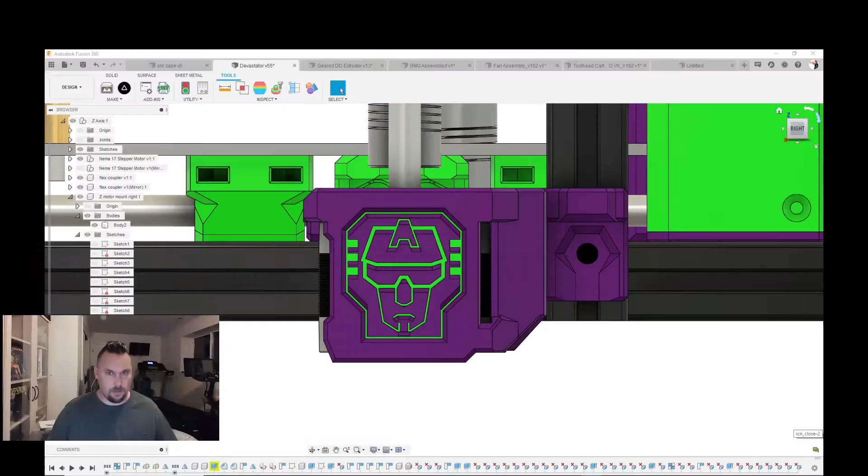So let's switch over to Fusion. Take a look at a model that I have up here. This is a Devastator logo that I've created. We're going to walk through taking this and creating an SVG out of the sketch that I used to create this icon. The first thing we're going to need is this.

This is an add-in called Origin. To get it, we need to go from the solid workspace, which is where we've probably started. Go to Tools, do the Add-ins dropdown, go to the Fusion 360 App Store.

Here we're going to search for Origin, and here it is. We're going to click on this and download it and install it like you would any other add-in. I've already got it installed. I'm not going to walk you through downloading and installing add-ins—there are plenty of tutorials out there on the web, easy to find, easy to do.

Back in Fusion though, now that we've got our add-in installed, what we need to do is decide how we want to use it. If you were to just run that tool, you get a bunch of different options on how you want to create an SVG.

There are single body, multiple body layouts, faces, entire sketches, and sketch profiles. None of these really work that well except for entire sketch. If you do sketch profiles, it makes it look like you're going to be able to select multiple profiles—you can't, you only get to choose one.

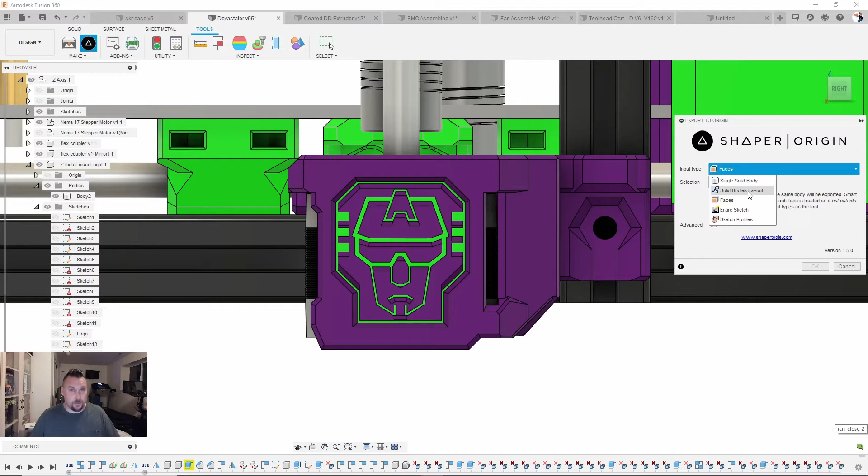The body stuff I've had zero luck with. What works really well is the entire sketch, and that's what I'm going to show you how to do.

So let's cancel out of this. Now you can go about this a couple different ways as far as grabbing what you want out of a sketch. When you select this, you're going to select an entire sketch. What I found is it's best to have a sketch that's nice and clean and ready to go.

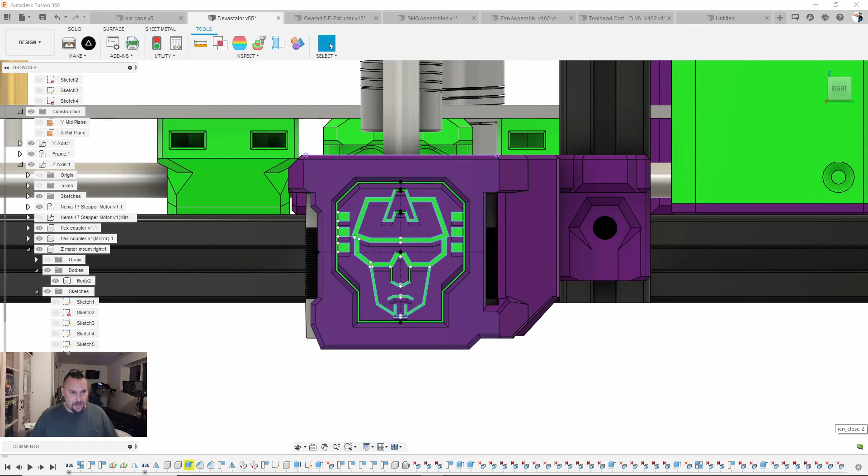So if I were to turn on the sketch for this logo, it's a pretty clean sketch—it's pretty much just this, but you also notice you've got this outline. And if I were to grab this and select this particular sketch, I'm going to get everything that's highlighted there.

Which we don't want. The best way to do it is to create a new sketch and pull those geometries in. I find the best way to create a clean sketch is to do it on a plane with no other geometry there.

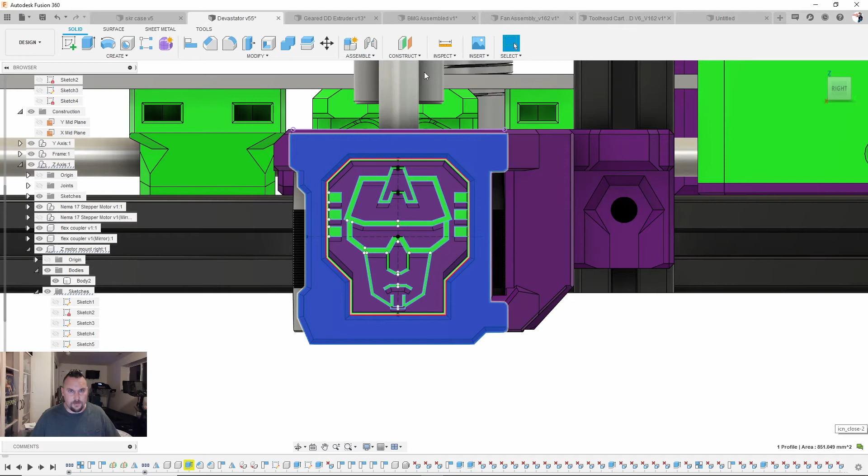So I'm going to quickly create an offset plane here. In the construction offset plane, I'm just going to pop that out 10 millimeters—the distance does not matter. Hit OK.

So now when I create a sketch here, I'm not going to have any geometry other than what I pull in.

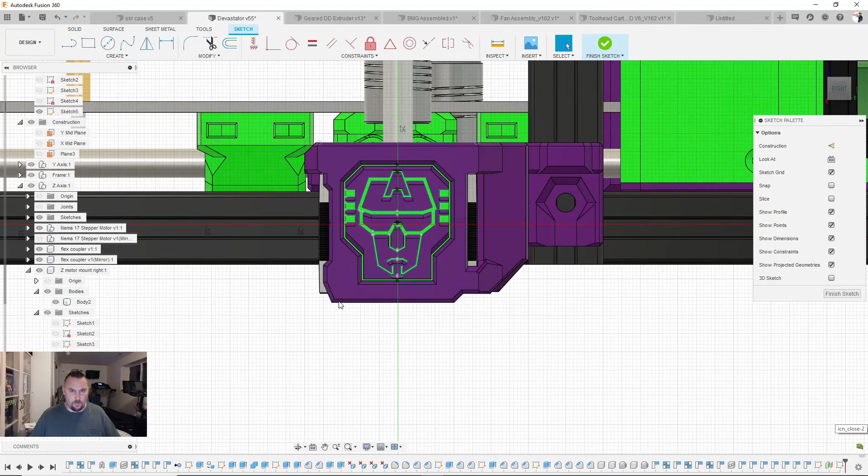And since this sketch is already visible, we can start projecting this stuff in with the project function. So we're going to hit P for project, and we're going to start grabbing stuff off of this sketch.

But you'll notice you're getting a lot of the bodies' geometry behind it. We don't want that, so let's turn off that body. Then we can start seeing this sketch that we want a little bit better.

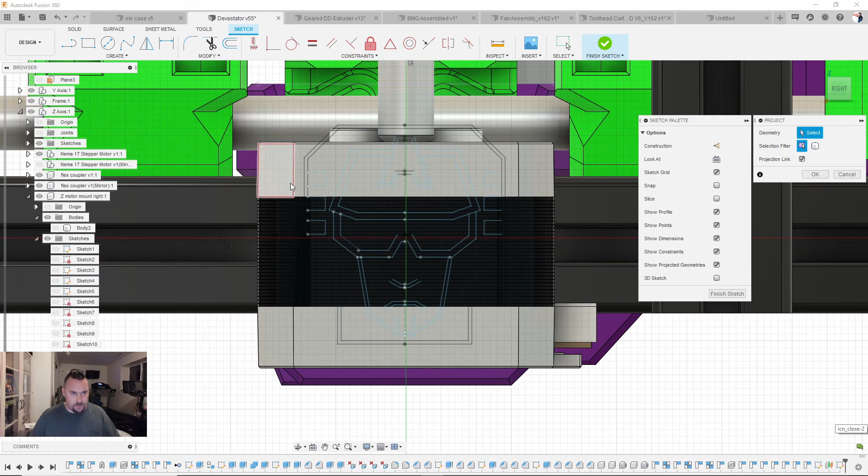I know where it's at, so I can just start. I like to double click—it gives you most of the connected lines. And I'm just going to start working my way around this to grab all of the sketch. Now I'm double clicking on two sides here because this was created using a mirror.

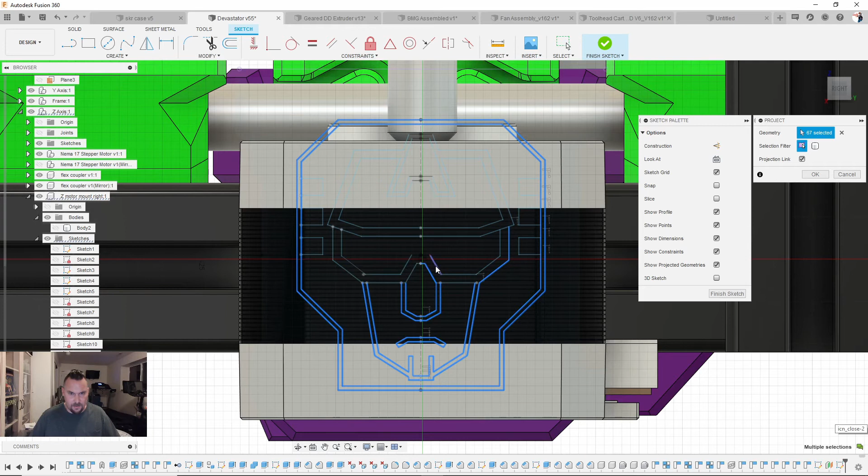When I drew the sketch, I only drew one side and then mirrored it, that way it would look symmetrical. Whoops, I grabbed something I didn't want, so you can just unselect those.

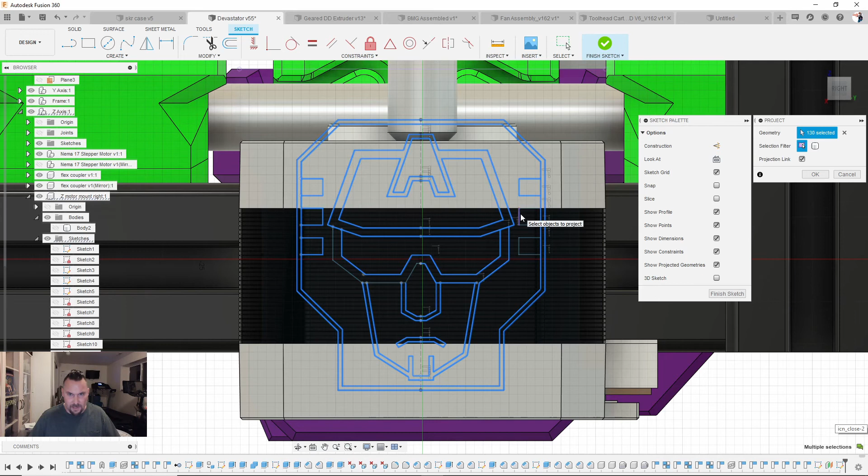The key is making sure you get everything. The dark background that the other model is creating is making it a little hard to see, but that's it—so now we've got our entire sketch there.

Projected into the new sketch. We're going to hit OK to that project. Got our sketch—we're going to hit Finish Sketch.

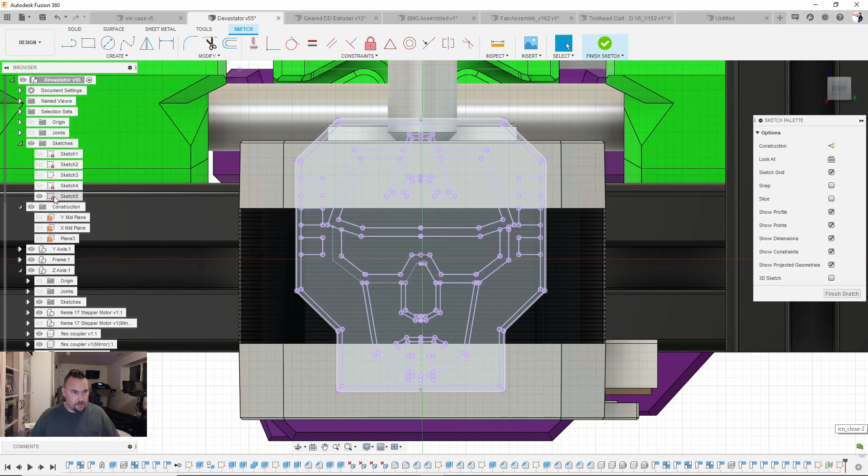And there it is. This happens to be up in the root, so there is that sketch. Looks good—we're going to finish sketch. I thought I did that already.

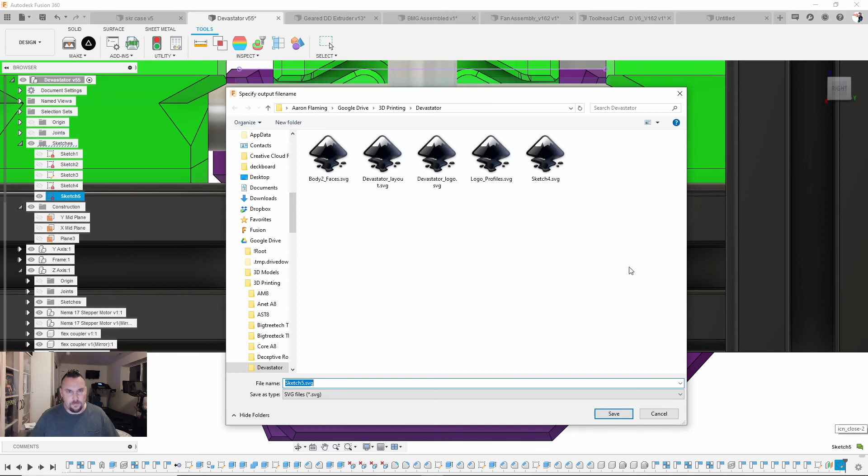And if we want to take a quick look at that in Inkscape, we can pull that over, and that's what the sketch came in as. Since this is not an Inkscape tutorial, and I am terrible in Inkscape, I'm not going to show you how to edit this.

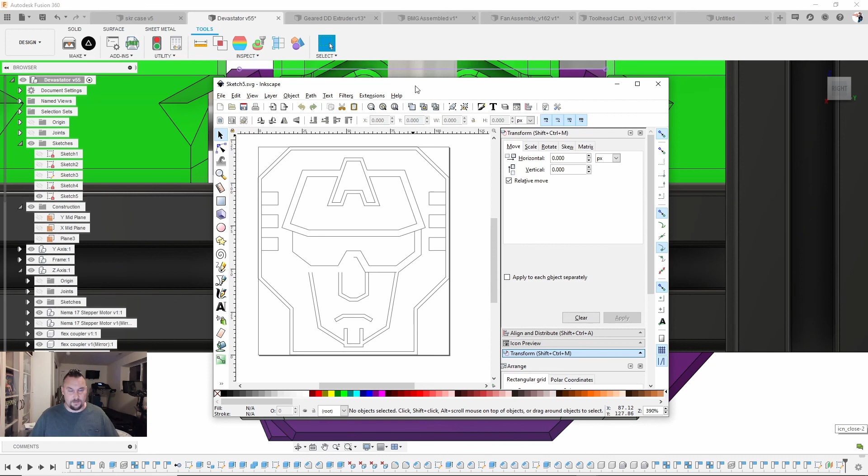But you most certainly can go through and make changes to the SVG at this point. I am noticing that we missed a couple of the lines when we did our project. We could go back and fix that if we wanted to, but it's just a matter of going back into that sketch, projecting it, and recreating this particular SVG.